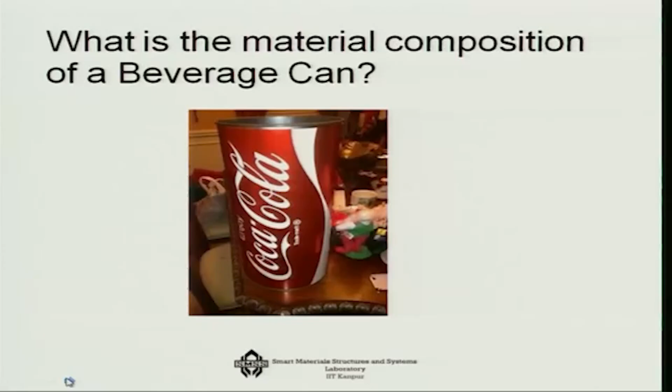If you find it out, you will see that the lightness is attributed to its aluminum base. Most beverage cans consist mostly of aluminum, but it is an alloy, so this is a non-ferrous alloy. It has 1% magnesium, 1% manganese, 0.4% iron, 0.2% silicon, and a very small percentage of copper. That is very interesting as an example of a non-ferrous alloy.

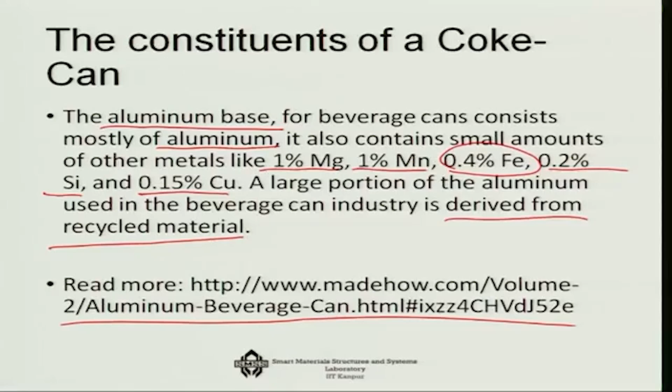One good thing is that this aluminum alloy can be mostly derived from recycled material, which means it is actually a very green way of using a material. I have given a site which you can visit to know more about this type of Coke can, how it is made, etc.

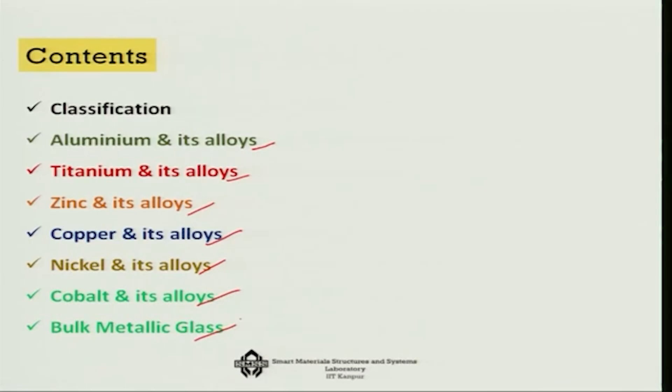So in today's lecture, we are going to talk first about the various classifications of metallic alloys, and then specifically focus on aluminum and its alloys, titanium and its alloys, zinc and its alloys, copper and its alloys, nickel and its alloys, cobalt and its alloys, and finally something totally non-crystalline in form, bulk metallic glass. So quite a bit we would like to cover in this lecture.

Now, what are the limitations of ferrous alloys? Ferrous alloys, no doubt, are very extensively used, but particularly for transport applications and white goods, they are not good. Why? Because they have relatively high density. They are very heavy, you can feel that. They also have low electrical conductivity, and an inherent susceptibility to corrosion under certain environments.

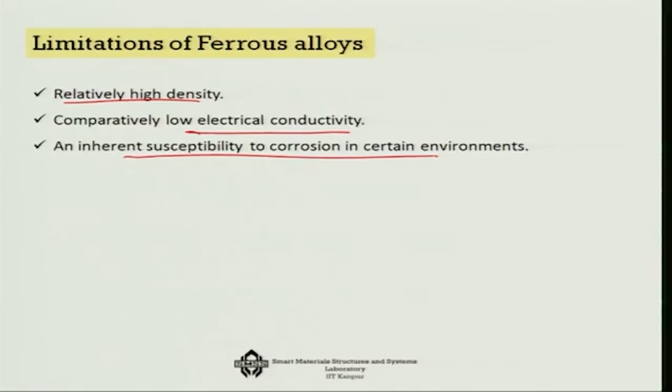Let's say under saline water, or take this Coke can example—Coke is highly acidic. So if you put Coke on a ferrous material, you would see how it gets corroded with respect to time. But this particular aluminum alloy composition has very good corrosion resistance. So density, electrical conductivity, and corrosion resistance are some of the important reasons why one has to go for non-ferrous alloys.

Now, the classification of metallic alloys: there is a branch of ferrous alloys with the base metal as iron, which includes steel, cast irons, etc., which I covered in the last lecture. In today's lecture, we are going to talk about non-ferrous alloys, where we discuss light alloys like aluminum, zinc, titanium and their alloys, and also heavier alloys, for example alloys with copper origin—copper, nickel, cobalt, etc.—and their alloys.

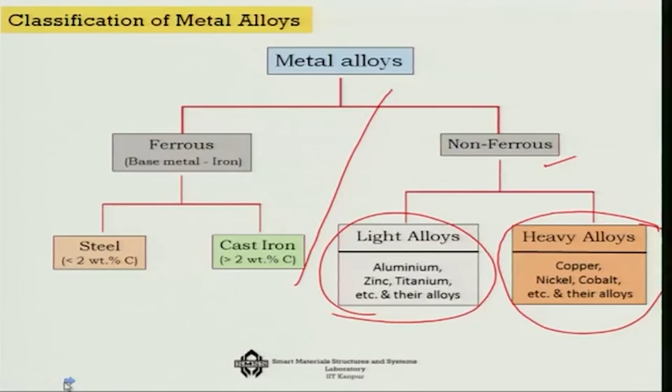So there is a light group and a heavy group. Let us first start with the light group, then we will go to the heavy group. So, light non-ferrous alloys—let's talk about it. The first material we will consider is aluminum.

Why aluminum? I already told you that aluminum is very abundant in Earth's crust. In fact it is so abundant that it makes no sense why we do not make everything out of aluminum, but historically we have not, mainly because extracting aluminum from Earth's crust is a very energy intensive procedure. It was not very well known till the end part of the 19th century, when people started to realize this, and aluminum at that point became a highly fashionable material.

In fact, during Napoleon's regime in France, aluminum was used as ornaments. That is how the journey of aluminum started, but people very soon understood its importance for transport materials—making sheets, radiation fins, wires, beverage cans—there are many applications. Aluminum has a face-centered cubic FCC crystal structure, with a melting point of about 660 degrees.

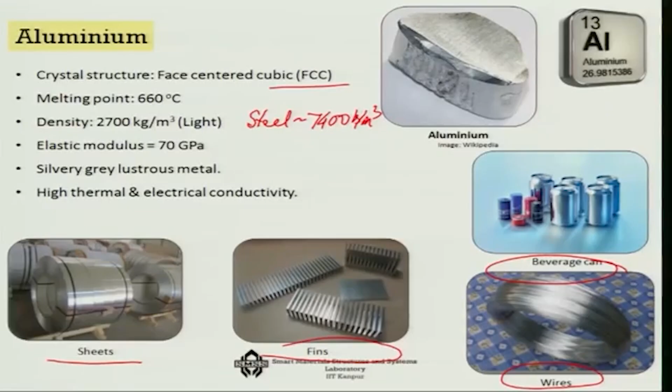Its density is very light, 2700 kg per meter cube. Compare it with steel—steel is something like 7400 kg per meter cube. So it is one-third the density of steel. The elastic modulus is of course lower, 70 GPa; steel has much higher elastic modulus. In color it has a silver grey luster, and it has high thermal and electrical conductivity.

Aluminum became very popular because of its fuel consumption benefits. There was a fuel crisis at one point, along with huge pollution. To reduce that, Europe had to come up with transport solutions based on lighter materials. It was found that replacing the car body with aluminum can save about 300 kg weight reduction in a medium sized vehicle of about 1400 kg. That is very good, because for every 100 kg reduction in the automotive sector, there is 20% lower exhaust gas emission, and proportionally reduced operating cost. As you reduce weight, you gain more reduction in exhaust gas and fuel economy. That is how aluminum started to be used in many cars.

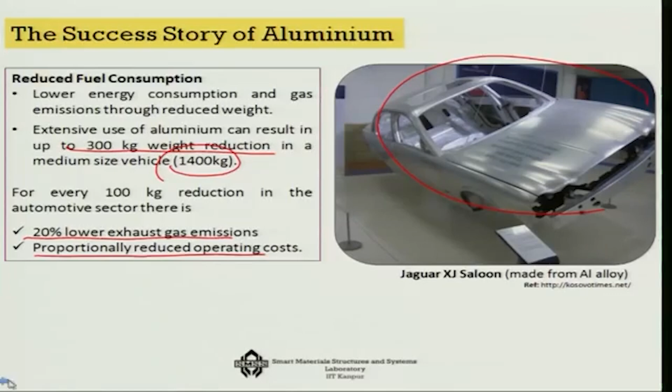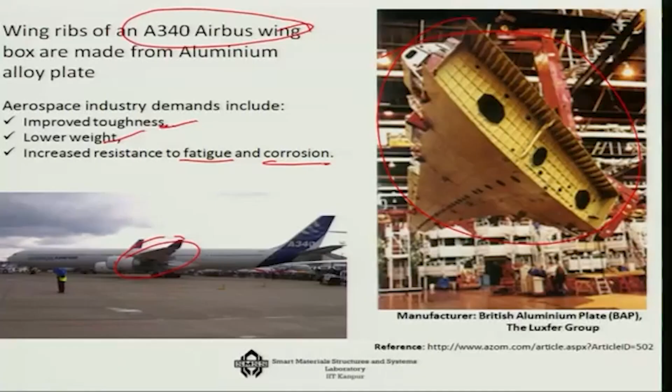The car body is actually substituted from ferrous alloys to aluminum and its alloys. Not only in automobile transportation, but today in aircraft transportation, the wing part of the A340 is made of an aluminum alloy based plate, forming a wing box. This is preferred because it has improved toughness, lower weight, and increased resistance to both fatigue and corrosion. That is why even the aircraft industry has interest in aluminum based systems.

There are many aluminum alloys, explored with various materials such as copper, magnesium, silicon, manganese and zinc. Depending on the alloying, there are different grades of aluminum. For example, grade 1 is pure aluminum, about 99% pure. The initial digits indicate the percentage of aluminum, sometimes shown as an XX.X series. The digit after the decimal, if it is 0, means casting, and if it is 1, that means ingot.

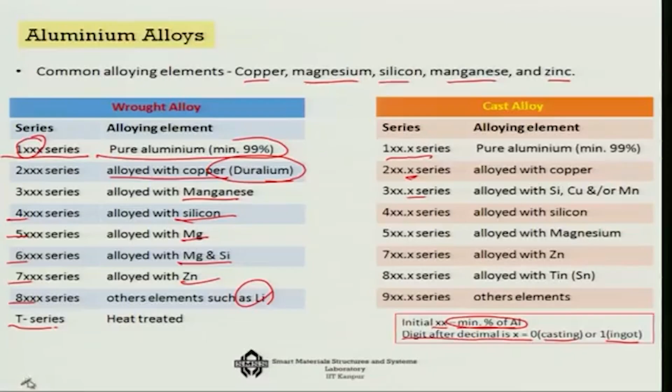Grade 1 is pure aluminum. Grade 2 is alloyed with copper, known as duralumin, the first material used for aircraft applications. Grade 3 is with manganese, grade 4 with silicon, grade 5 with magnesium, grade 6 with magnesium and silicon, grade 7 with zinc, and grade 8 with other elements such as lithium. If you see a T, that means it is also heat treated. That is how we define various grades of aluminum.

The next material important in transport applications is titanium. Its density is higher than aluminum but lower than steel, about 4500 kg per meter cube. So on a density scale, aluminum is less dense than titanium, which is less dense than iron based alloys. Its melting point is quite high, 1660. Its elastic modulus in pure form is also higher than aluminum but lower than steel. Tensile strength is about 150 to 500 MPa. It has a silvery grey white metallic luster, and its alloying has certain typicalities.

Titanium has basically 2 kinds of structures. Below 883 degrees, it has an alpha structure, which is hexagonal close packed, HCP. Beyond 883, it has a beta structure. In alloys, you may find either an alpha or a beta, or near alpha, or alpha beta structure, based on the presence of some amount of beta configuration in it.

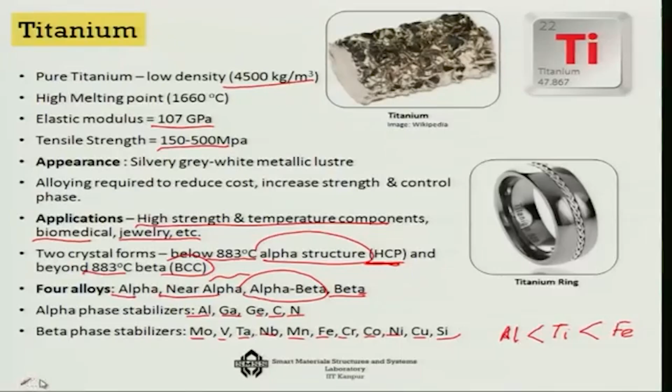Because of this excellent lightweight, high temperature performance and good strength, titanium is used in high strength and temperature components, biomedical applications, and also in jewelry because of its good luster. There are many aircraft applications where it is used. For alpha phase stabilization, materials generally used are aluminum, gallium, germanium, carbon, nitrogen, or even oxygen. For beta phase stabilization, molybdenum, vanadium, tantalum, niobium, manganese, iron, chromium, cobalt, nickel, copper and silicon are used. That is titanium as such.

Now let us talk about titanium alloys. Alpha titanium alloy to begin with, that is the low temperature phase. It contains alpha phase stabilizers, has low to medium strength, good notch toughness, and reasonably good ductility.

It has excellent mechanical properties at cryogenic temperature, but it is non-heat treatable, which is the problem with the alpha series, and they are generally very weldable. Example: Ti 8Al-1Mo-1V, meaning 8% aluminum, 1% molybdenum, 1% vanadium, rest titanium, giving a tensile strength of about 950 MPa, used in jet engine components because of the cryogenic temperature requirements.

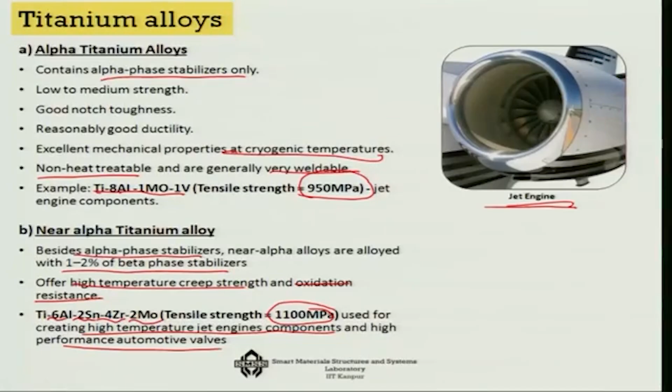The second group is near-alpha titanium, which has alpha phase stabilizers plus a small amount of beta phase stabilizer, about 1 to 2%. They offer high temperature creep strength and oxidation resistance. One example has 6% aluminum, 2% tin, 4% zirconium, 2% molybdenum, giving a much higher tensile strength of 1100 MPa, used for high temperature jet engine components and high performance automotive valves due to its high temperature performance.

Then you have alpha-beta titanium. This is metastable, meaning not a very stable configuration, generally including a combination of alpha and beta stabilizers. It is weldable, but welding risks some loss of ductility. Strength levels are medium to high. Hot forming qualities are good, but cold forming often presents difficulties, and creep strength is usually not as good as in most alpha alloys.

One example is titanium with 6% aluminum and 4% vanadium. This is used where low density and good corrosion resistance are necessary, such as in the aerospace industry, bioimplants, and prosthetic applications.

Finally, the important one is the beta titanium alloys. This is fully heat treatable and generally weldable. It is capable of high strength, possesses very good creep resistance up to intermediate temperatures, and cold formability is generally excellent.

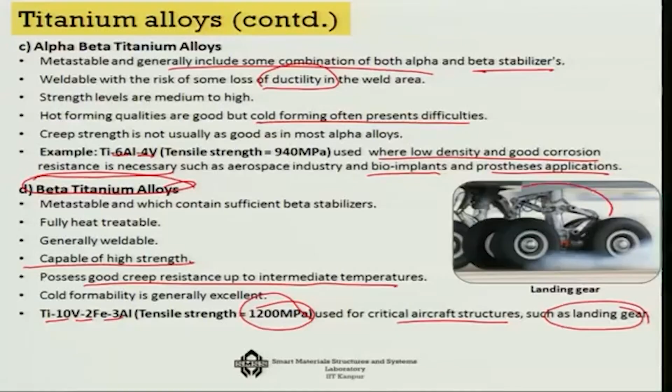One example is with 10% vanadium, 2% iron, and aluminum, giving a tensile strength of 1200 MPa. This is used for many critical aircraft structures such as landing gear applications. As you can see, the landing gear part is often made of titanium alloy, specifically a beta titanium alloy. So that is about titanium alloys.

The next is zinc. Zinc shares one commonality with titanium in that it is also hexagonally close packed, HCP, but its density is very high. We are suddenly jumping from a low density to a reasonably high one, very close to iron, 7140. Its melting point is also not very high, 420 degrees centigrade. It has a silvery grey lustrous appearance and easy castability.

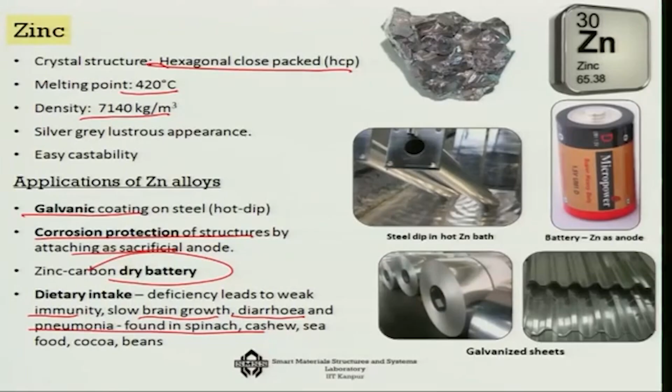Applications of zinc are mostly in corrosion resistance, like galvanic coating, corrosion protection of structures, and also in batteries. In our body also we need a small trace percentage, needed for good immunity, brain growth, and to prevent diarrhea, pneumonia, and similar problems. So zinc in a very small trace amount is generally needed in our body too. That is the basic zinc overview.

Zinc has many alloys which we will discuss when we talk about other heavy non-ferrous alloys. So when we discuss non-ferrous alloys, one of the base materials is actually copper.

Copper has a face centered cubic structure, FCC, with a quite high melting point of 1085 degrees centigrade, and is heavier than steel by density at 8920. It has a distinctive orange color, as you can see.

It is used for all the traditional utensils, because it has good corrosion resistance, so it does not corrode very easily. It is also soft, malleable, ductile, and very tough, meaning it can be given various shapes. It has very good machinability, and one reason it is used for cooking systems is its good electrical and thermal conductivity.

In terms of thermal conductivity, the three materials generally used are silver, which has the highest, then copper, then aluminum. In very pure form, like 99.99%, copper is used for electrical wires; otherwise we use it in alloys. It has about 97% the conductivity of silver, but costs only 1/8 of silver, so you may call it the poor man's silver. That is the good part of copper.

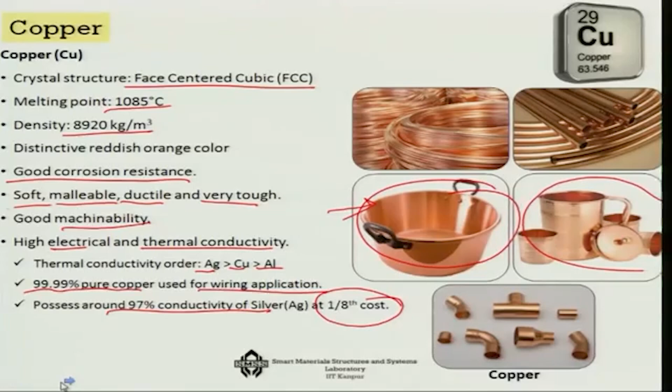Now, what alloys does copper generally form? The most important one is brass, which contains zinc. Earlier we talked about zinc, and zinc actually goes in as a substitutional impurity, meaning copper atoms and zinc atoms are of considerable similar size, so one can be substituted inside the lattice of the other.

Also tin, aluminum, silicon, magnesium, nickel and lead are also added. An important thing about zinc addition is that as zinc increases, strength increases, hardness increases, ductility also increases, but the conductivity reduces.

Commercially, there are two types of brass. One is alpha brass, which has about 30% zinc. This has many variations, for example gunmetal with 2% zinc used in bearings or bushes, gliding metal with 5% zinc used in coins, medals and jewelries, admiralty brass with about 28% zinc and 1% tin used in condensers, evaporators, heat exchangers, and cartridge brass with about 30% zinc used in ammunition cartridge cases, automotive radiators, lamp fixtures, where the degree of zinc is much higher.

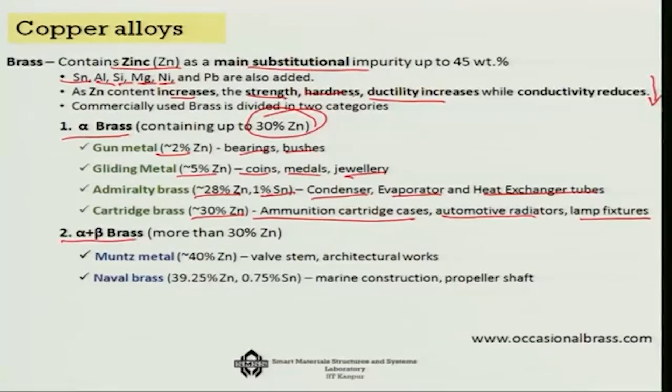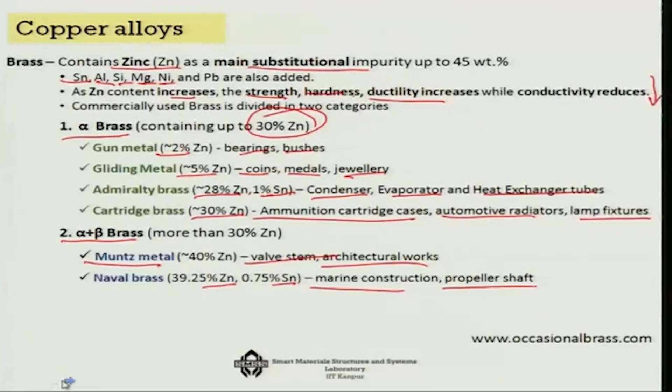If you get even higher percentage, that is alpha plus beta brass, you get things like Muntz metal with 40% zinc, used in architectural works or valve stems, or naval brass which has zinc as well as tin, used for marine construction and propeller shafts, giving very good corrosion resistance. So that is about the two types of brasses developed from copper.

There is also a very important variation of copper alloy which is bronze. An entire part of civilization is categorized as the bronze age. In bronze, instead of zinc, tin is the main substitutional impurity. This gives better mechanical properties as well as better corrosion resistance than brass, but it is comparatively hard and resists surface wear.

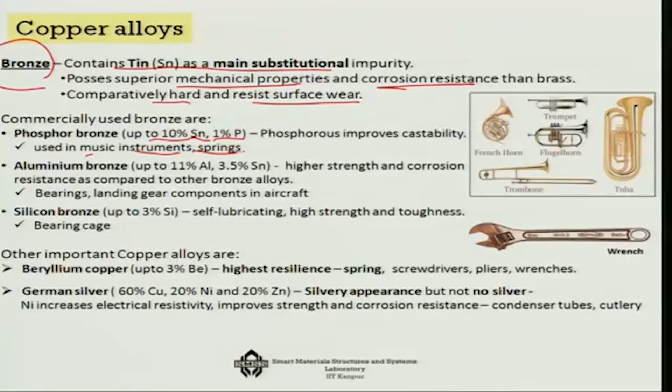For example, phosphor bronze with about 10% tin and 1% phosphorus is used in musical instruments and springs because it has very good castability. Aluminum bronze, with about 11% aluminum and 4% tin, gives high strength and corrosion resistance and is used in bearings, landing gear components, etc. Silicon bronze, with about 3% silicon, is self-lubricating with high strength and toughness, and hence is generally used for bearing cages.

Copper also has two relatively less used but important alloys. Beryllium copper has the highest resilience, so it is used for springs, screwdrivers, pliers, wrenches, etc. And German silver, which is about 60% copper, 20% nickel and 20% zinc, has a silvery appearance, but it is not actually silver.

This is because of copper, nickel and zinc, and the nickel increases the electrical resistivity and improves strength and corrosion resistance. So it is used not only for such items but also for condenser tubes, cutleries, etc. German silver has a considerable amount of copper, some amount of nickel and some amount of zinc in it. So that is about the copper alloys.

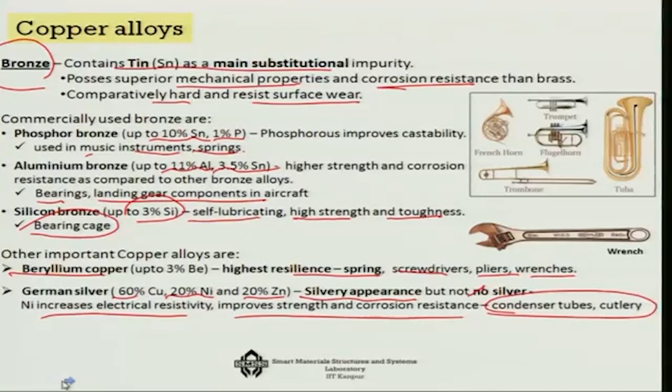Next, we are going to talk about nickel. Nickel has an even higher density compared to copper, 8900, but it also has a similar FCC structure, and the melting point is pretty high, 1455 degrees centigrade. It also has a silvery white lustrous metallic luster. That is why, when used with copper, this luster predominates and you get German silver out of it.

Application-wise, nickel is used nowadays very much in batteries and also in alloys with copper, like the very famous Monel metal, primarily composed of nickel and copper with traces of iron, manganese, silicon and carbon. It has strong corrosion resistance and is used in heat exchanger tubes, food processing plants, marine applications, etc., wherever there is a chance of corrosion.

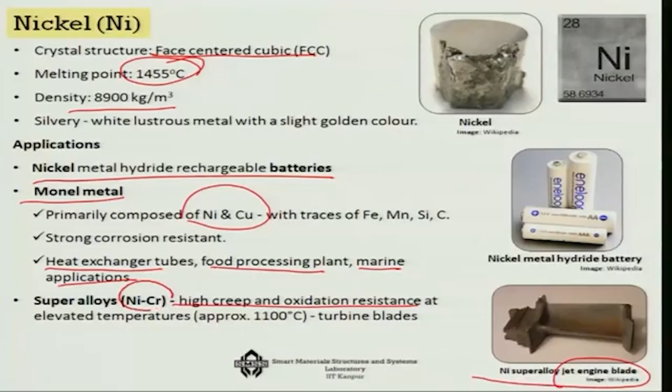Of course, the other use of nickel is in super alloys. Super alloys are used in jet engine blades, and for that you need high creep and oxidation resistance at high temperatures like 1100 degrees centigrade, and there nickel-chromium alloys work in a fantastic manner. So these are the super alloys where nickel is basically used.

Next, we are going to talk about cobalt. Cobalt we have already seen used with steel as an alloy or with other metals, but on its own cobalt has a hexagonal close packing (HCP) structure, density similar to nickel at 8900, melting point also very high, and the luster is silver-grey. Elastic modulus is about 209 gigapascal, considerable, like steel.

The main application of cobalt is for high performance alloys, particularly when, just like nickel and zinc, you need corrosion and wear resistance. Some high speed steels contain cobalt for heat and wear resistance. Some medical orthopedic implants use cobalt, chromium and molybdenum together - there is Vitallium, which is used in medical orthopedic implants.

They are sometimes alloyed with platinum - 95% platinum and 5% cobalt - for jewelry applications. Interestingly, it is also used with ceramics and glasses to give a distinctive blue tint, cobalt glass. So basically it has high temperature anti-corrosive applications.

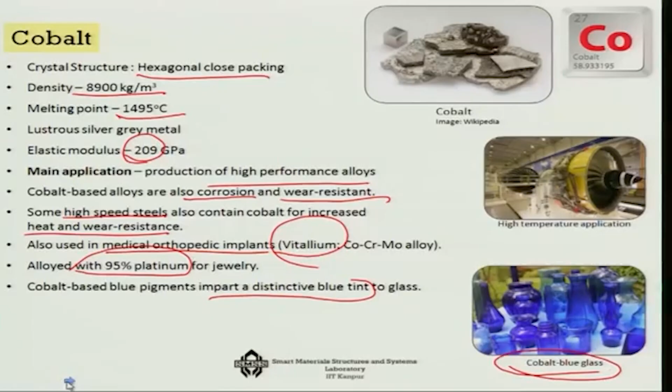Now, so far we have talked about various types of non-ferrous alloys, and all of them have crystal structures like hexagonal close packed structures or FCC structures. Now, can a metal not have an amorphous shape, that is, can we have metals with no regular crystal structure?

Yes, you can, but to do that you have to have rapid cooling from the liquid state. Until recently, the cooling rate required was of the order of 10 to the power 5 to 10 to the power 6 Kelvin per second. So fast you are supposed to cool it if you want to really make a metal amorphous. Naturally, even so, you can make only something like a fraction of a millimeter thickness - some ribbons and wires, etc., which you can use for transformer cores or as magnetic sensors.

Why should we go for the amorphous shape? It is because with the amorphous shape we get more machinability, ductility, etc., while sacrificing some of the properties, maybe like thermal resistance or conductivity.

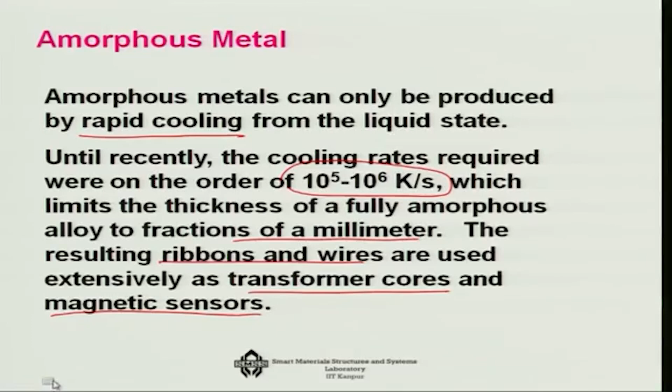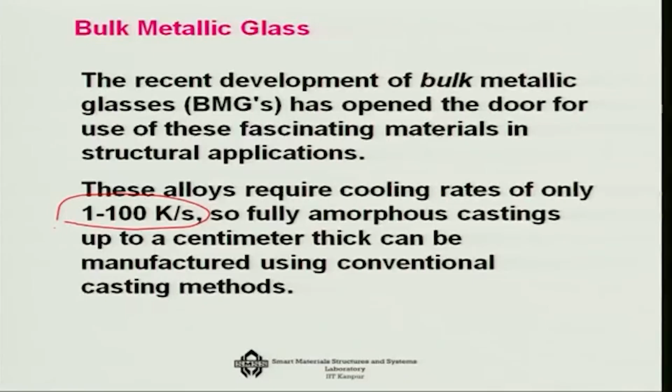Now, bulk metallic glass is something in which this cooling rate is brought down to something like 1 to 100 Kelvin per second, and that is possible because of certain eutectic mixtures that we can prepare today. For example, you can see this bulk metallic glass structure, and in the SEM picture there is no grain, unlike this polycrystalline metal structure where you can see so many grain boundaries.

So as there are grain boundaries, what do we get? One is dislocation resistance - dislocations cannot spread across the boundaries, which means you get resistance in terms of really deforming the system. On the other hand, in this particular case, you get very good formability of the system, but you keep some of the good properties of the metal, like good elastic modulus.

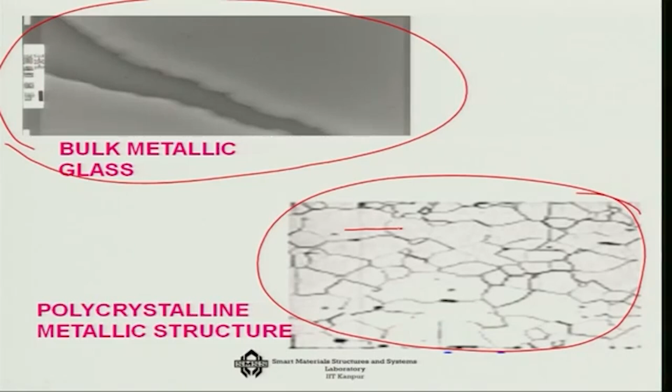You also get better properties in terms of things like the resistivity of the system. So that is how bulk metallic glass comes out to be a very good material, which can be used for some very specific applications where, instead of ceramics - because ceramics are brittle - that brittleness is not there in metals.

So that is where you can actually substitute it. This is one example: if you use zirconium, titanium, nickel, copper and beryllium in a mix, and then use this rapid cooling technique, you get a tensile strength of about 2 gigapascals, and a high fracture toughness of 20 megapascal square root meter.

The density is much lower - that is another advantage of the amorphous stage. The density is about 6.1 grams per cm cube, and this alloy exhibits almost no plastic strain at failure, but typically shows up to 2.5% elastic strain. Compare that with metals, where generally it is something like 0.1%. So the elastic strain becoming 2.5% is a very high gain.

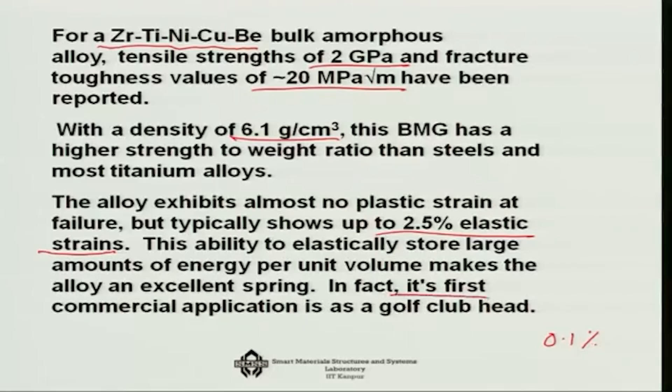And if you look at the percentage strain also, you can go much higher than steel, aluminum, etc. - something which you can compare only with polymers. So that is the good thing about it: you get a much higher level of strain, but also a very high level of strength. That combination makes glassy alloys like bulk metallic glasses a very unique new material.